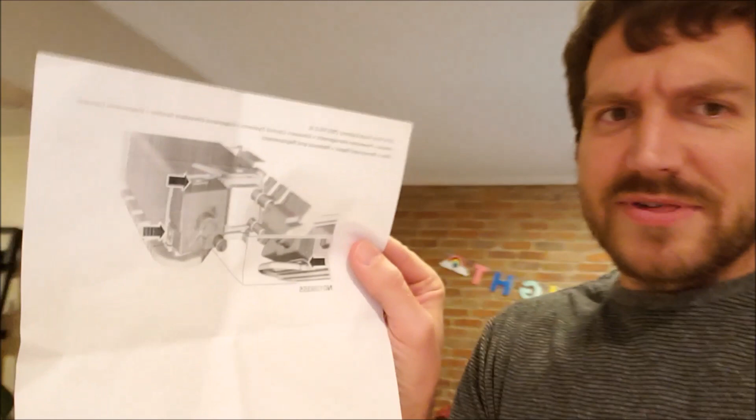So let's figure it out. All right, so I got the part. The gas vent solenoid. Canister vent, gas vent cap solenoid. Whatever I said earlier, that's what this is. All right, and it was $70 at O'Reilly.

So let's see if it gets rid of that check engine light. I'm a mess now. I got my Gravedigger shirt on because it's time to get mechanical.

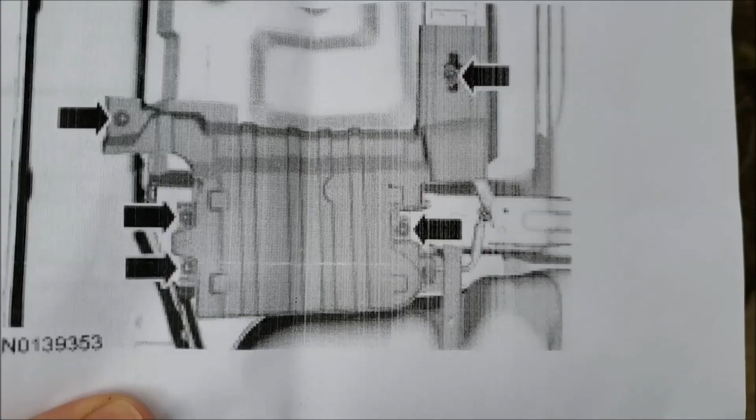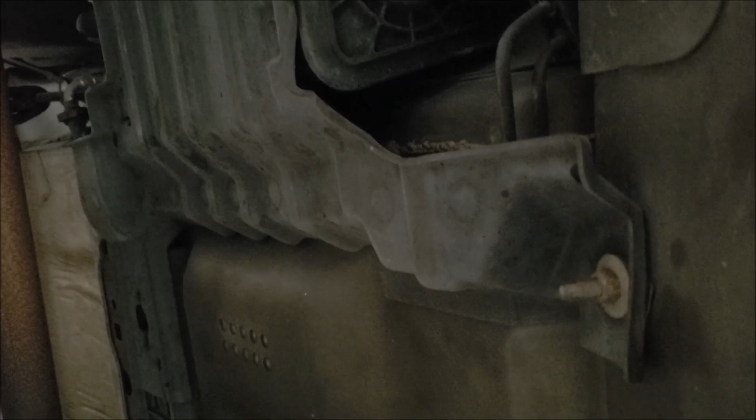Okay, so looks like we got 5 screws, looks like that. I think this is it. I don't know if you can see that, but we got to remove this cover. This is the cover, this is the canister. The solenoid maybe on the other side, hopefully. I don't know. Let's climb under here, shall we?

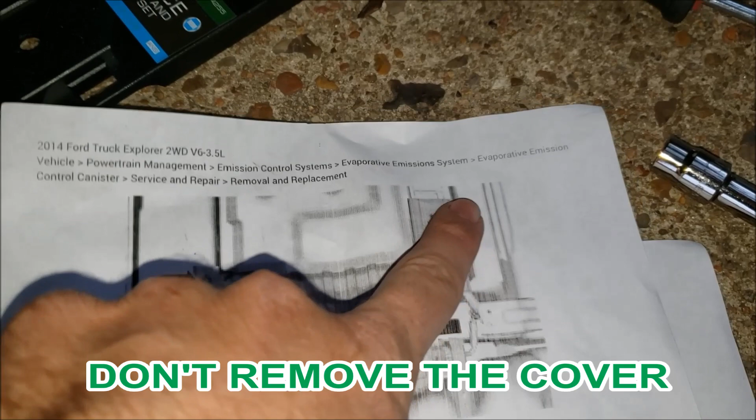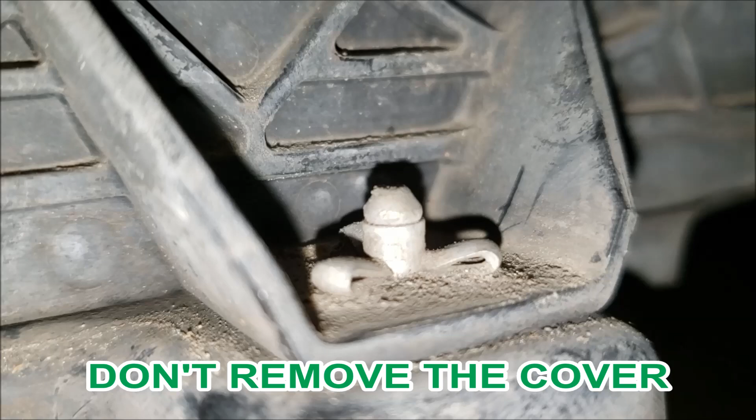All right, so I've got this one first, this one second. Now I'm gonna go back, get these easy ones next. Maybe I could just, I don't know, because I don't even see this one yet. What the heck is that? I don't even know what that is.

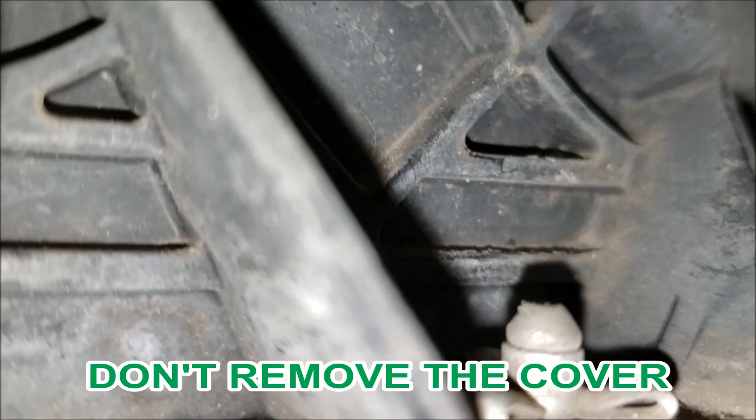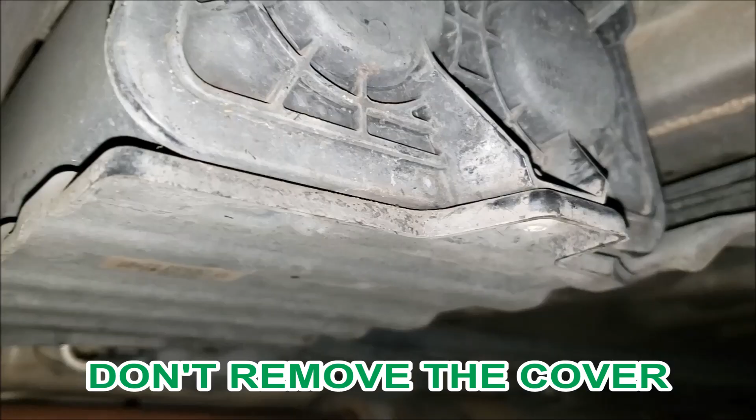Like that bolt tied its shoelaces or something. How the hell am I supposed to get that out? Is that a cotter pin? Son of a bitch. Alright, so I thought it was that one, but no.

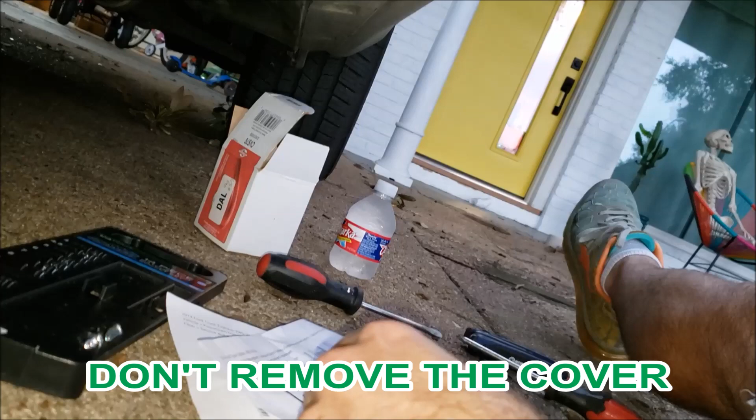It's these two. So I'm going to take out these top 2 right here next. So normally they look like this, but on this other one the whole thing came out. So hopefully I can put that back. But yeah, it's starting to come down now, guys.

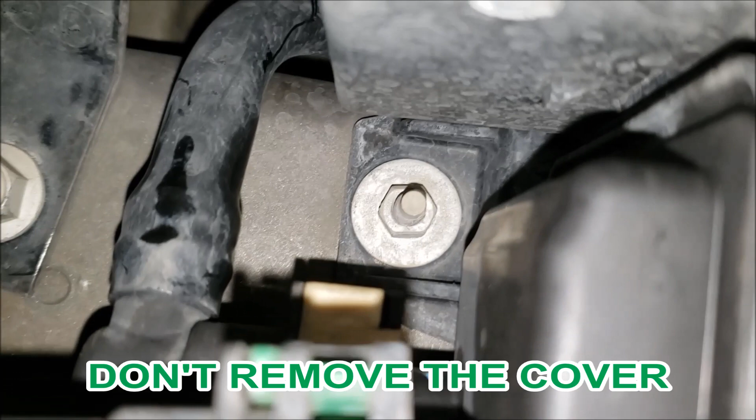Canister, it's the canister, the evap. Evap canister is coming out. Alright, let's get the last one. That's the last one, man. Why does it have to be so far back?

I'll see if I can get it. Oh, jeez, it's coming out, guys. It's coming out. Alright, it's loose, I'm gonna let it come down. Hopefully not on my face. God, my arm's stuck. Alright, all the bolts are loose. It's coming down, it's coming down guys.

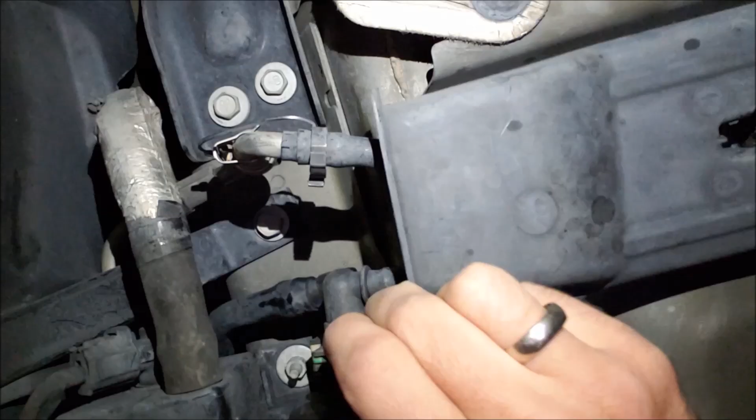I wish it was the other way around, but whatever. Okay, because everything I need to disconnect is on the far end under the car. But okay. I don't even know if taking off all those screws was worth it, because I'm still stuck to this damn box.

There's the tube, tube shot. Oh, just wiggle it off. Right? There's no connection here. Some insulation. Yep, just wiggled it off. This is the electrical, and you just pinch it somewhere to pull that off. Push it down hard enough.

That's working out for nothing. Come on. Oh yeah. Alright, piece of cake. So now we got the electrical out and this air hose out. How is it attached to the canister?

Tab on the bottom. Tab on the right. I see it. Tab on the top. 3 tabs on this thing. The question is, how do you push it out? I can't film and do this. I'm just going to pinch it and pull out 3 tabs. Top, bottom, and right. Of course I wasn't filming, but after pulling out the 3 tabs you just pull it out, straight out. This is, I guess, a push connector or something, because it just popped right off.

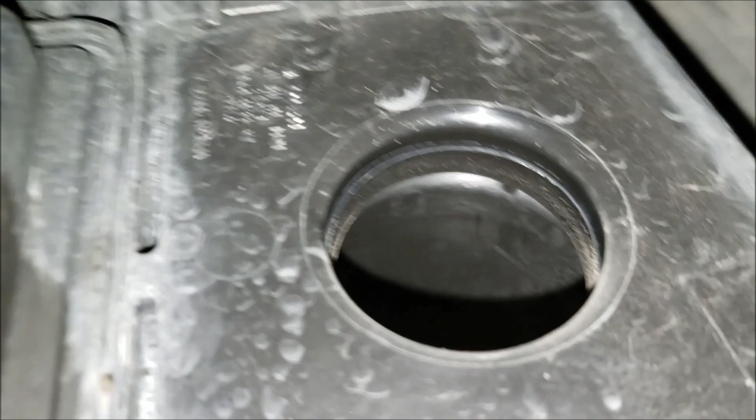So let's take a peek inside, shall we? What is in this canister? It's like nothing. Alright, well I'm just gonna stick in the new one. Hopefully it snaps in place, and then put the tube and solenoid back on.

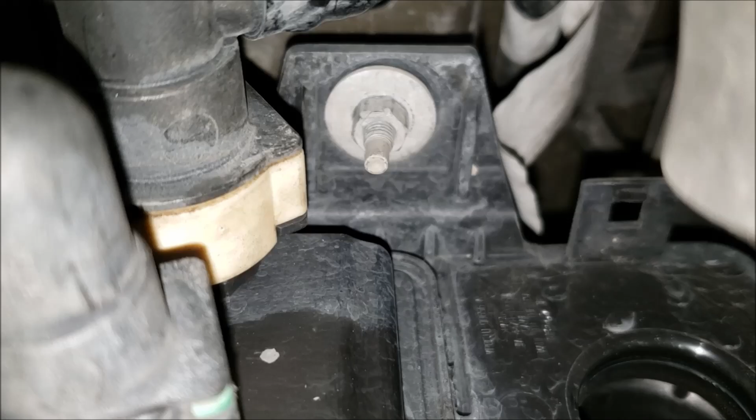P.S. I don't think you need to undo all those 5 bolts. But I'm gonna do it and turn it on and see what happens. My neck is sore. Don't take off those 5 bolts, you don't need to. Alright, moment of truth.

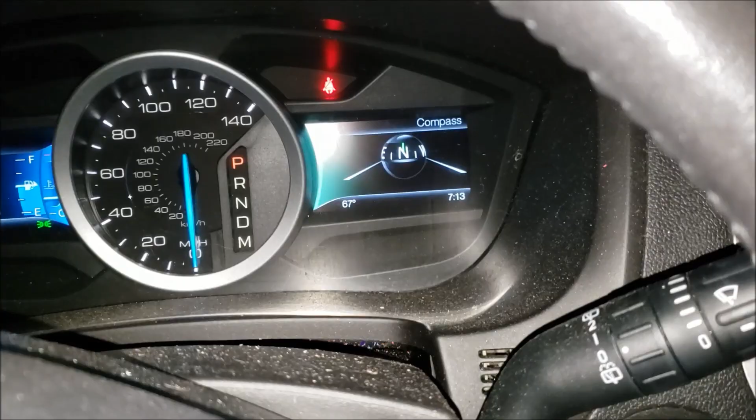See ya, wouldn't want to be ya. Check engine light, gone. Capo Jabba 1, Ford Explorer 0. Capo Jabba like 4 or 5, Ford Explorer problems. That's how you fix it. P1450 no longer exists. We'll see you later.

$70. Actually, and $30 for the... just kidding.

Gosh, this freaking day. Alright, have a good one guys. P1450, done. What's next, Ford? Come on, bring it.